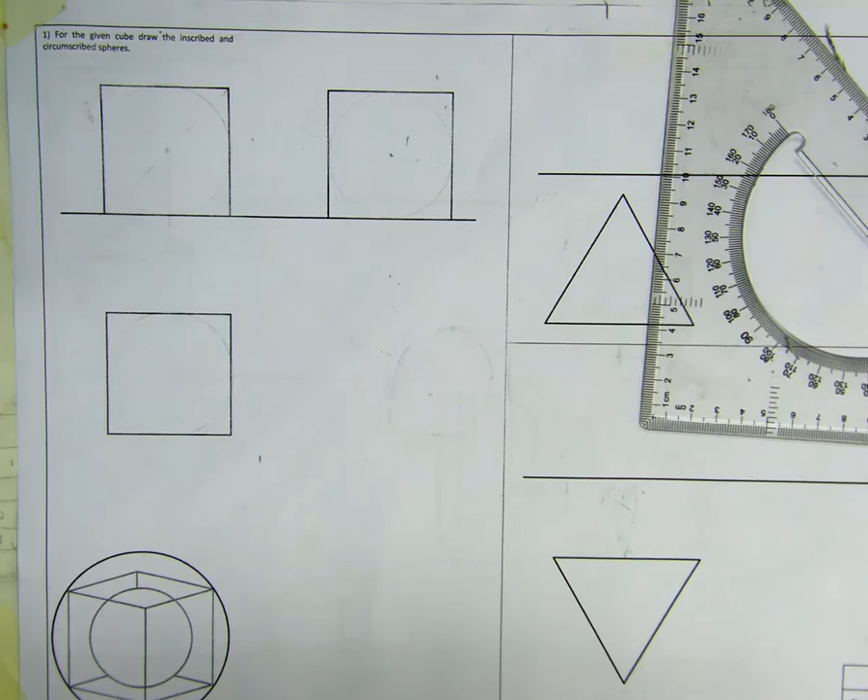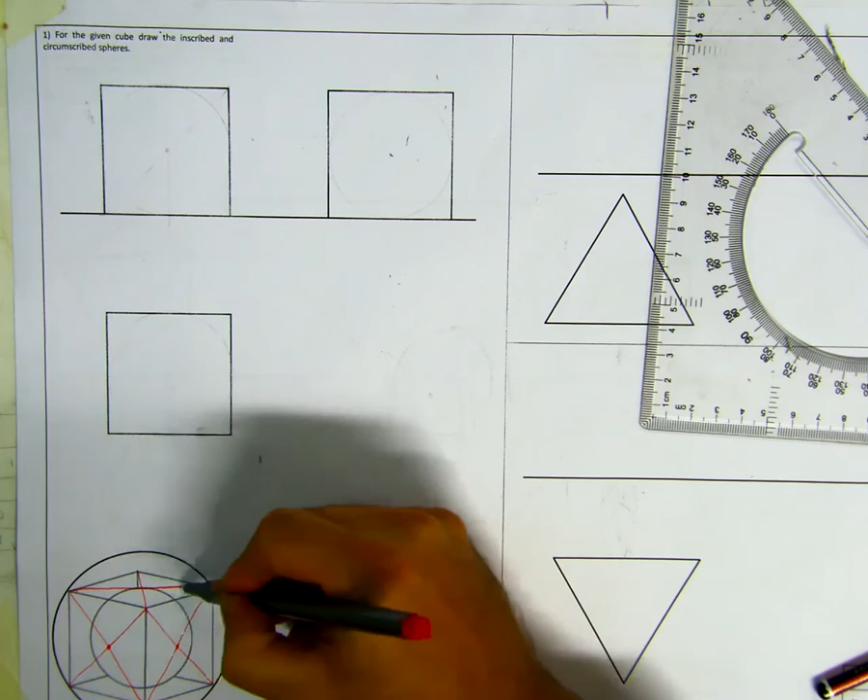Okay, so an inscribed sphere inside a cube. As you can see here, there's the cube with the inside sphere. If you join the corners from one point to the other using a straight line or 45 degree set square, that will give you the point of contact - the point where the sphere touches the face of the cube.

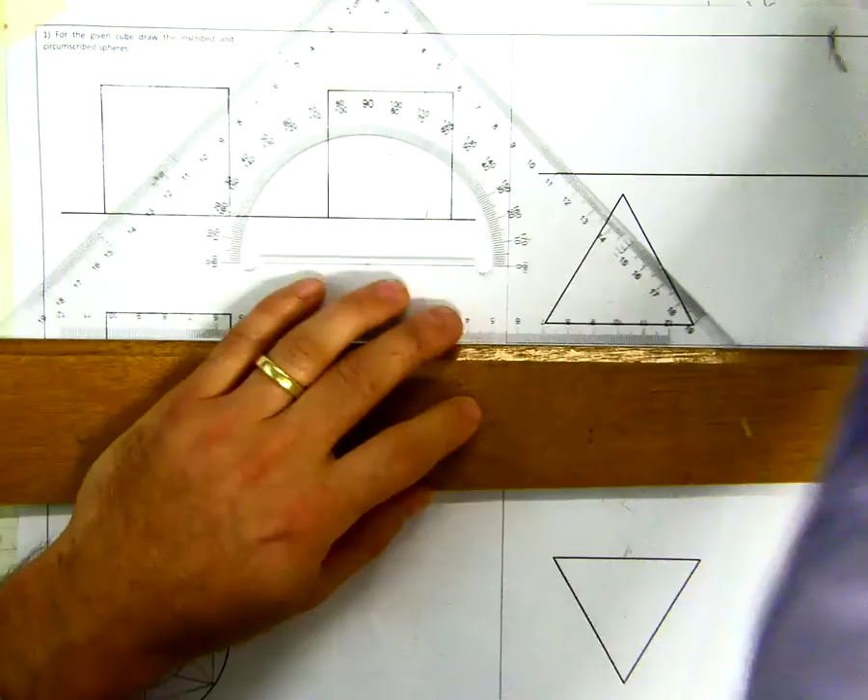First thing we need to do is find the center of this cube, which is easy because we just join the diagonals using the 45 degree set square. Where they intersect or cross each other gives us the center. Once we have the center, we'll bring a line down here. That point there is going to be our radius, so we get our distance from the center to the edge.

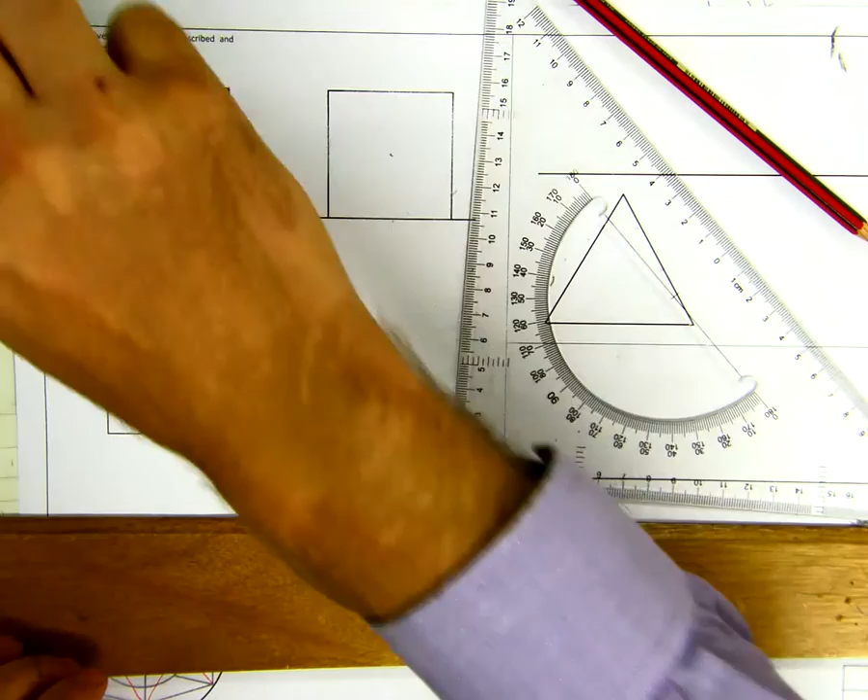Double check now you have it perfect, just touch it on the edge. So that's the sphere inscribed - there's one inscribed.

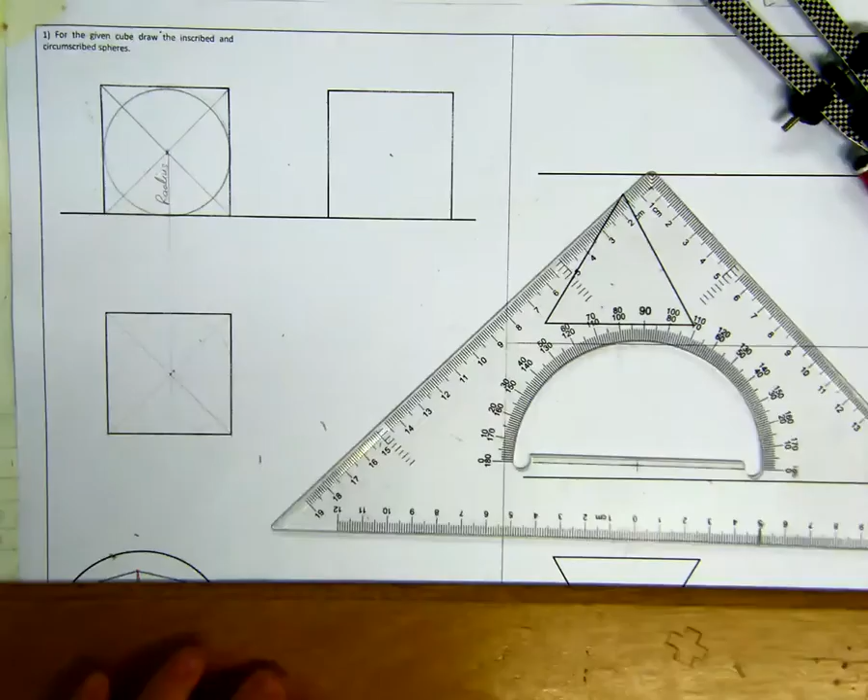Next thing we need to do is bring down the center line. Join the diagonals again over here and over here, which gives us our new center point. Once we have the center point, we can use that - our radius should be the exact same because it's a cube, all the faces are the same. Just swing our sphere, our radius.

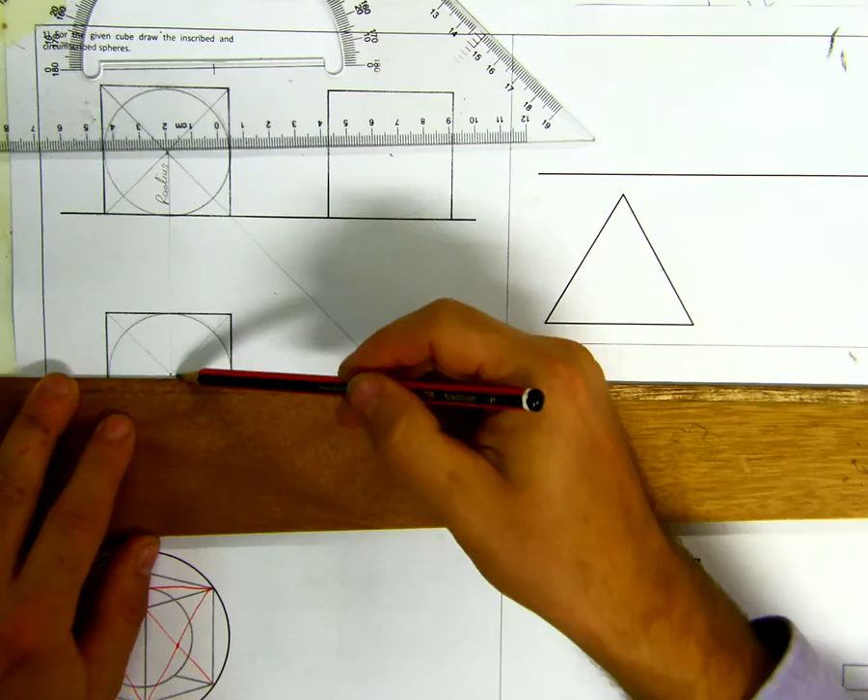Next thing we do then, we can bring everything down 45 degrees, bring across our center point. So we have our center point in two views - let's find it in the third view. Just bring it across, hits the 45 degree line, bring it up, bring it across, and that's going to be our center point. We have our radius still on this - if we are correct, it should hit our line in the right place.

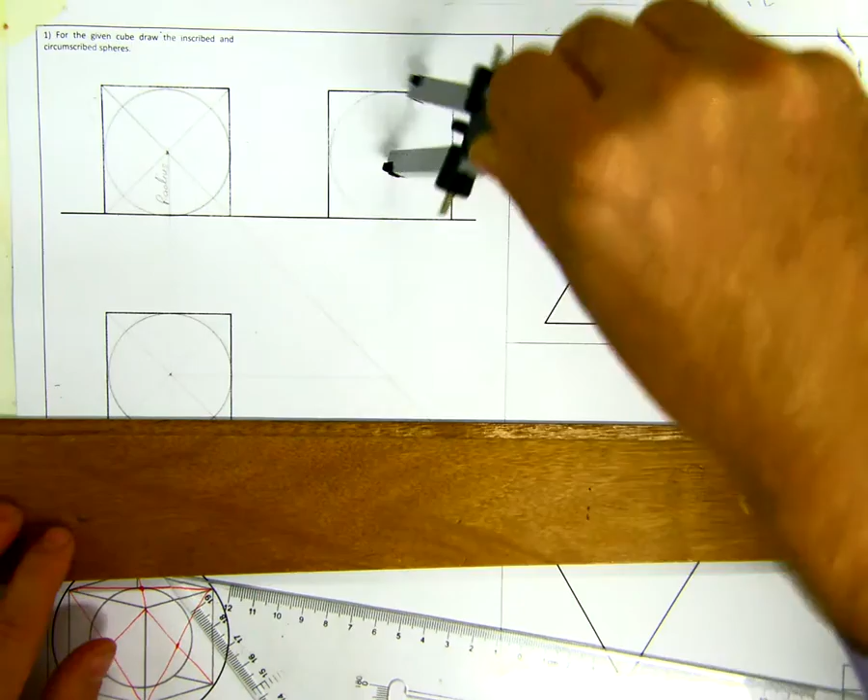Okay, so here's a point of contact - POC, point of contact. Same point of contact. So you're going to have a point of contact on every single face for an inscribed sphere.

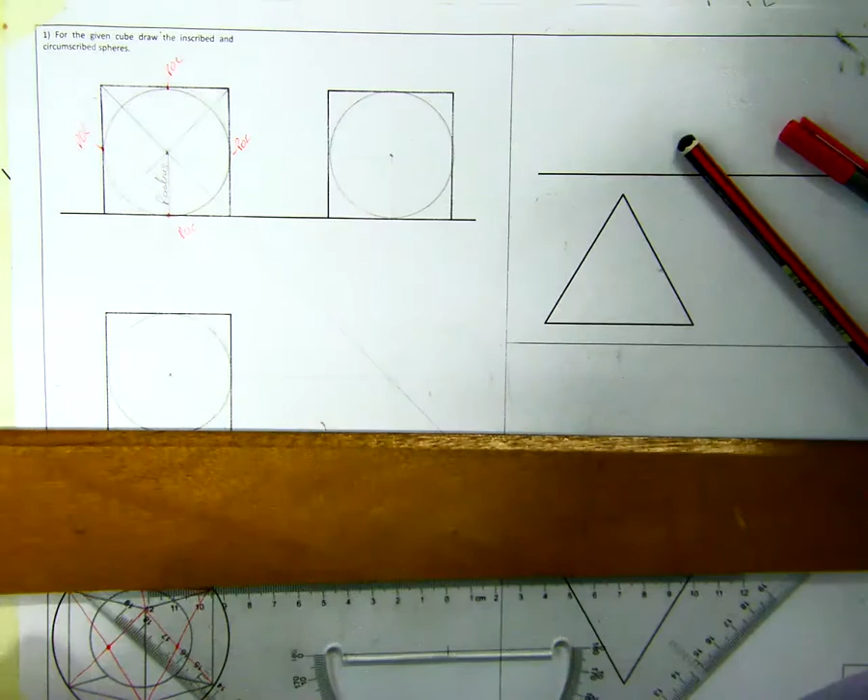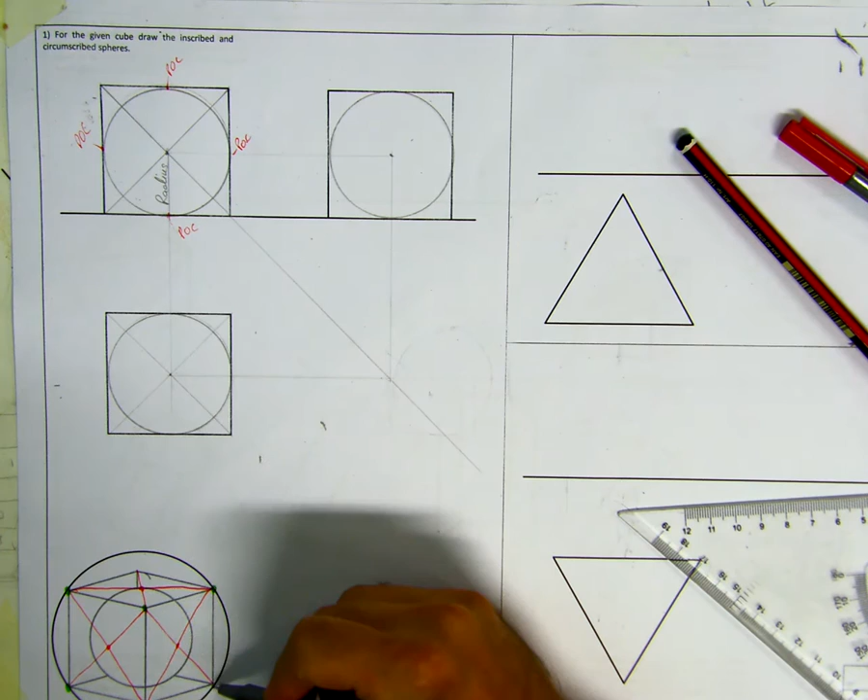Next thing we need to do then is circumscribe it - so circumscribing means we're putting the sphere around the cube. We can see here that our cube touches the sphere in every corner, or every apex of the cube touches the point of contact on the sphere. We've one at the back as well. This isn't as easy to do, so we have to follow our procedures - we need to get a true length.

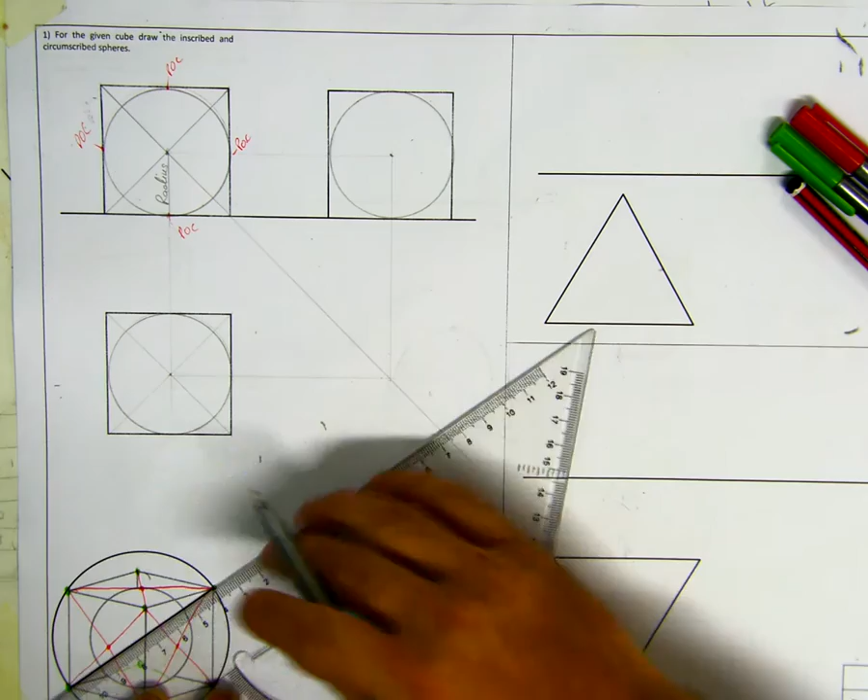So by joining the diagonal, using the brown marker here, by joining the diagonal from one corner to the other like so, and there are other diagonals from one corner to the opposite corner of the cube - where they intersect each other is going to be the center point.

So the first thing we do, in plan, we will draw in that diagonal, so it just looks like a line in plan. In elevation, our line looks like this. We have to look in here at 90 degrees because we need the true length of this line.

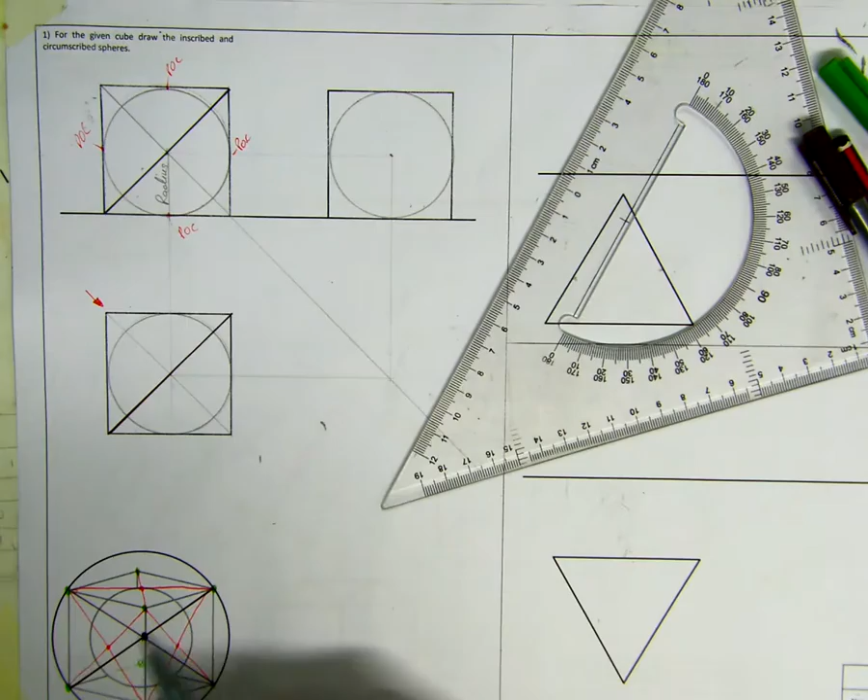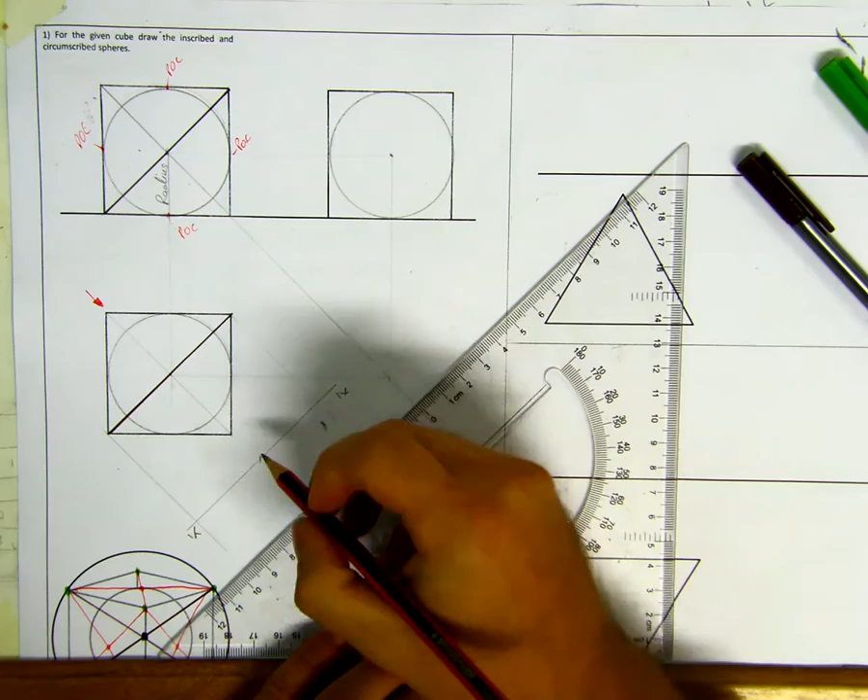So we look in 90 degrees to it, and we're going to project out here - I'm going to project the end out here. We're going to set up a new x1, y1 line. Make sure now that this is 90 degrees, here and here, 90 degrees.

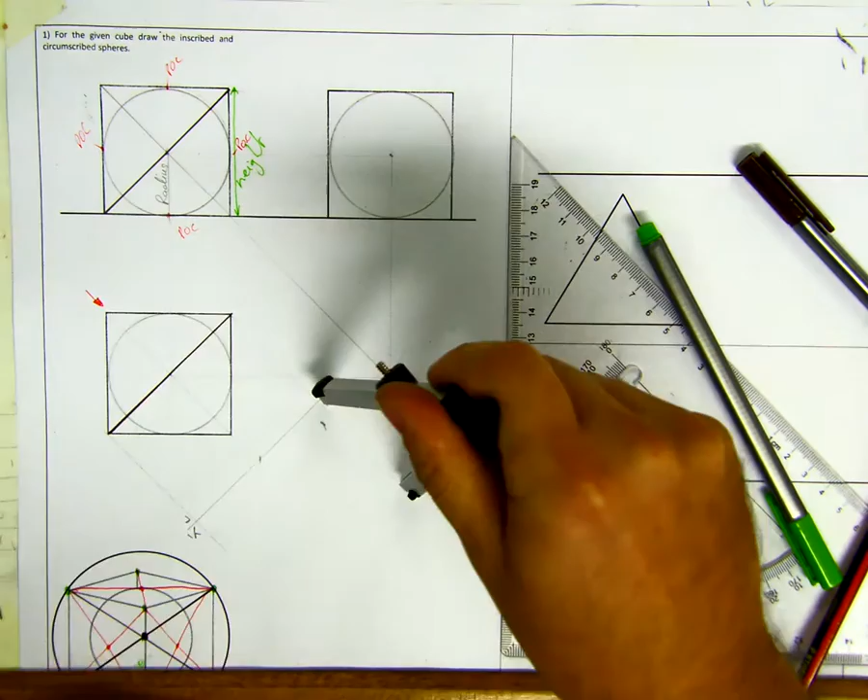Then we will project our height - so we have to take our height over here from our elevation. All heights are always taken from elevation. Once we get our height, we're going to step it up on this line - there's our height. Once we have that height, we join it back, so from there to there is actually a true length. So we have our true length line.

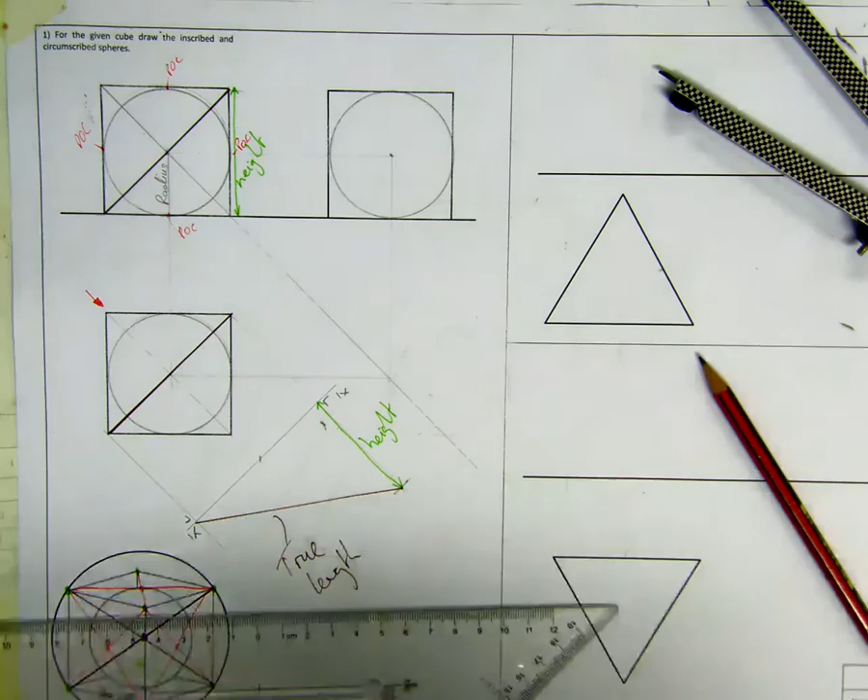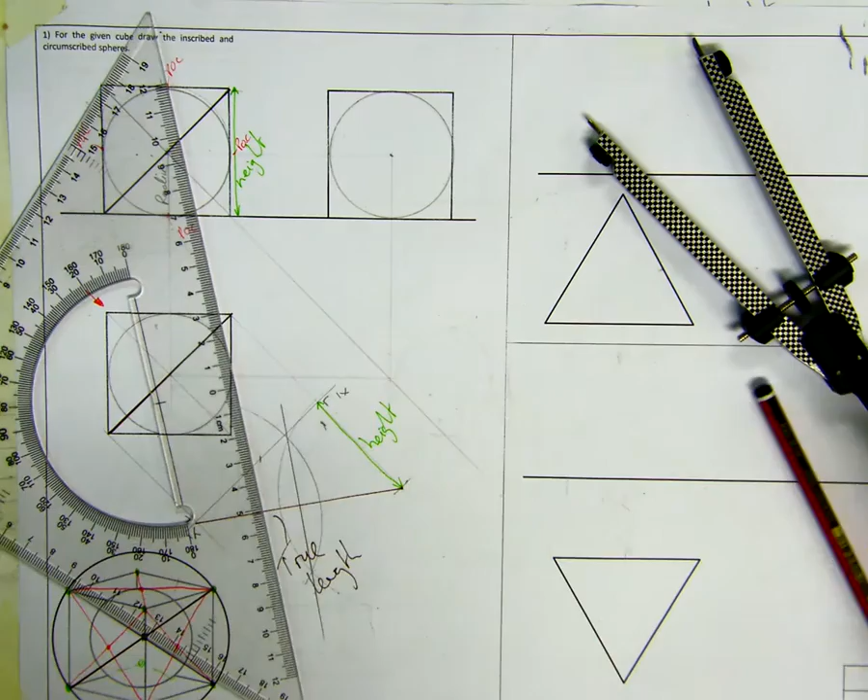We also need to project up our center point, but if we do, it won't give us a true point, so we need to bisect this line to find the center. The center of this will give us the radius of our circumscribed sphere. So we bisect it - from there to there now will give us our radius.

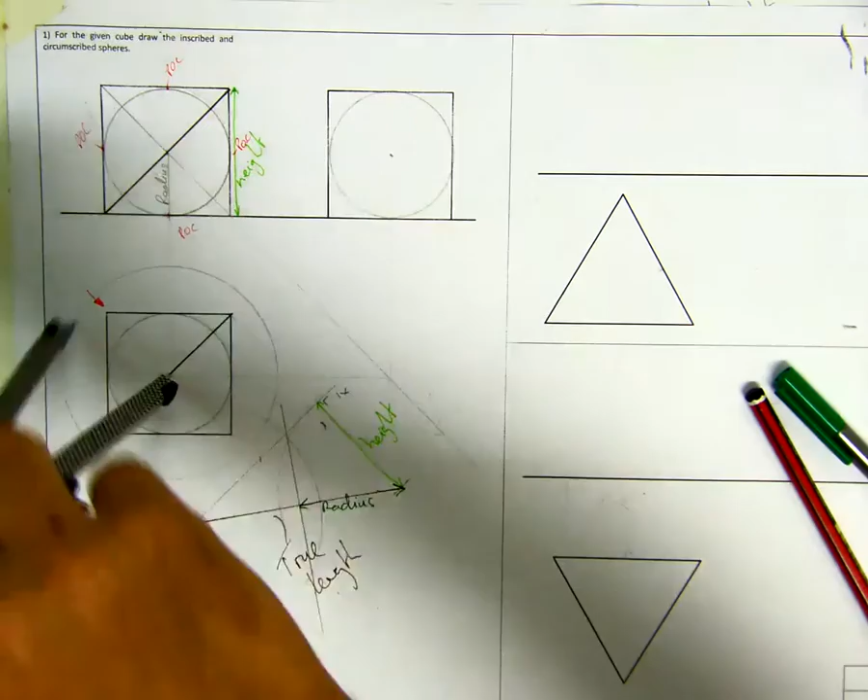Okay, so we're going to take that radius, and because they share the same center point, we can use that center point to circumscribe in the elevation and circumscribe it in our end view. So in all our views it looks like our corners are touching.